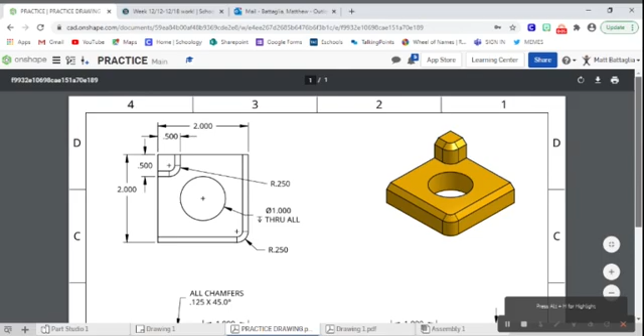Today we are working on creating this, our practice drawing. Taking our practice model, going ahead and placing it in with a few orthographic views as well as an isometric view, going through and annotating it with center lines, center marks, as well as dimensions, and then the submission process.

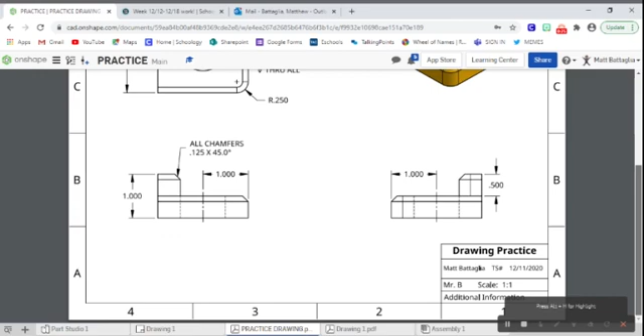So let's get started. In order to get started here, we are going to start with our blank drawing template. So go ahead and bring up that blank drawing template. I just so happen to have my template in with my part number one. You can start a new one, whatever works for you.

But make sure you have this blank drawing template, and we are going to go ahead and place in our views. So we're going to start with our base view. Our base view is going to be the view that all of our other views are based off of. In order to place a base view, you're going to go up here where it says Insert View, and we'll click that. It's going to ask you first which part or model you would like to insert.

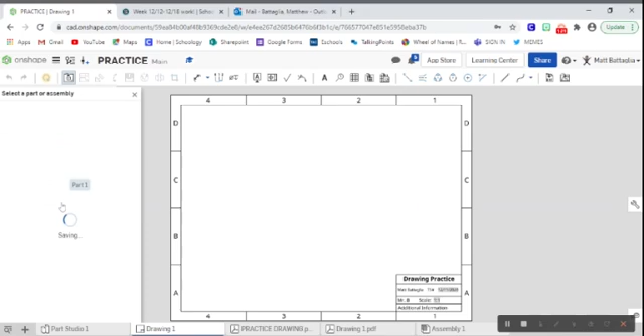In this case, we want to insert part one or model one. Once you've selected a specific part, you want to make sure that you're orienting it in the correct direction. You want your base view to kind of be your front view. In this case, this works great for our front view, we're just going to keep it just like that. So what I want to do is kind of line it up generally where I want it to be. Right here is good.

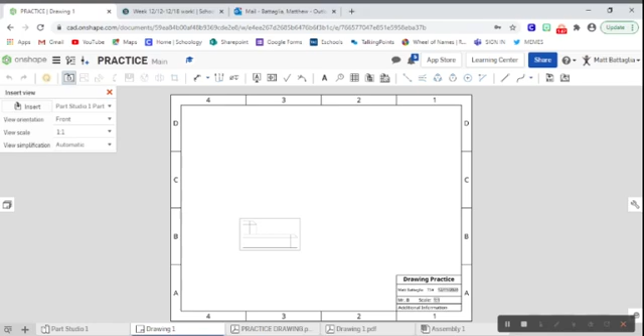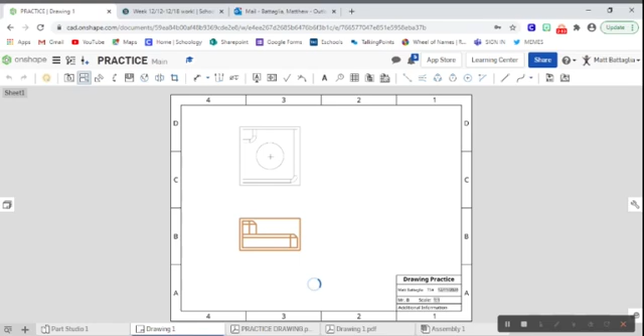We can always adjust it later. I'll go ahead and do a left click and release. When I left click and release, you'll see that I have kind of a general outline of this front view right here. Now, before you do anything else, we can go ahead and immediately place our top view, and you can kind of see what this top view will look like based off of its projection. So we'll go ahead and drag this top view on top, and we'll do a quick left click, and that will go ahead and create those views.

Now you'll see if I move this view, I go ahead and I move this view is going to move in conjunction with it. So that's why when I say base view, that's what I'm mentioning. It's all of our views are based off of this view. And if I move this one, that one will move in conjunction so that these are aligned with one another.

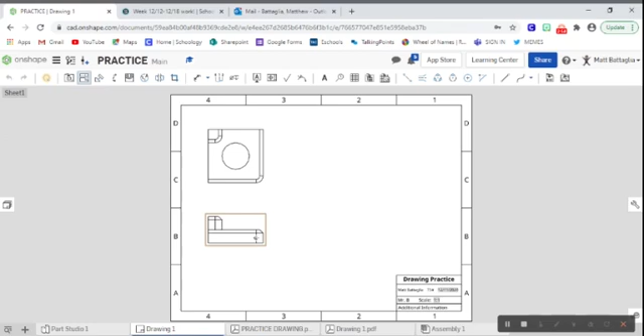Now, we have our front view, we have our top view, but we still need a few more views. We need our side view, and we need our auxiliary view or our isometric view. So I'm going to go ahead back up to projected view, and I'll go ahead and left click projected view, and I'll go ahead and left click on our base view, and I'm going to drag out and place our side view or right view. Go ahead, left click. Once you have that in, that's great.

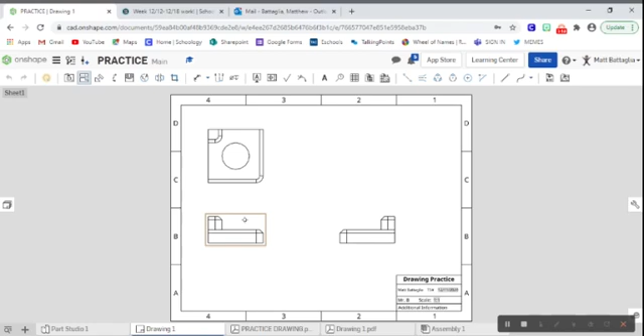We're going to do one last view, and that will be our isometric view. So once again, if I left click my base view and drag out, you'll see that I now have my isometric view, or that kind of 45-degree three-dimensional view. I'll go ahead and left click, and now I have all of my views placed. So I will escape out of that tool, so I'm no longer in it.

And once again, you can see that all three of these orthographic two-dimensional views move in unison, which is really great. So we'll go ahead and adjust those around. That looks good there. We'll adjust this over here. And now we are ready to set ourselves up.

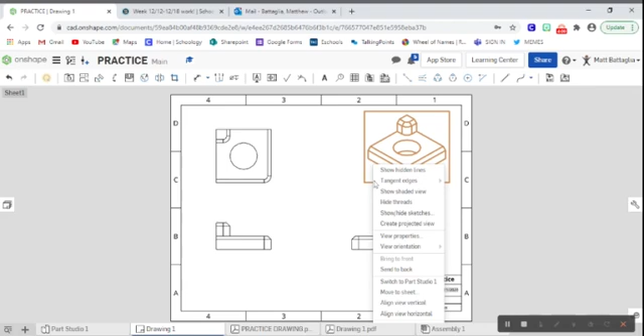So the first thing I'm going to do is I'm going to go ahead and right click on our isometric view, and I'm going to press Show Shaded View. When I press Show Shaded View, it will go ahead and load in that color or material or appearance in which I selected in our previous step. So there you go right there, that's our shaded auxiliary or isometric view.

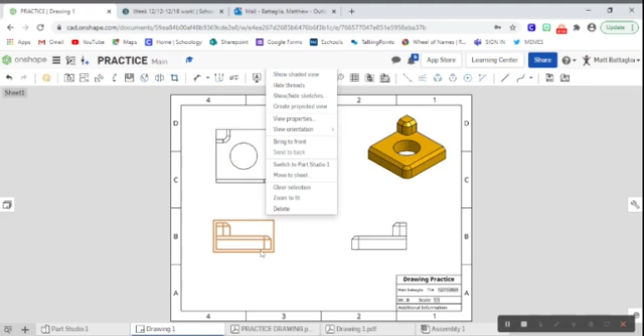So the next process in this is going ahead and adding our hidden lines to these orthographic views. Right now we do not have our hidden lines added. We don't have too many in this, but it's good to include. So I'll right click my base view, and right now it's kind of hiding it, but I should be able to, yes. So if I click on one of the other views, show hidden lines, you'll see it went and shows it. Now it is kind of hard with this. Maybe if I scooch this down.

Show hidden lines. Make sure you're seeing your entire menu, and go through clicking on all 3 of these views. Might have to move that one down as well. Right click, show hidden line, right click, show hidden line, right click, show hidden line. Now you can see my hole showing as my hidden line on my side view.

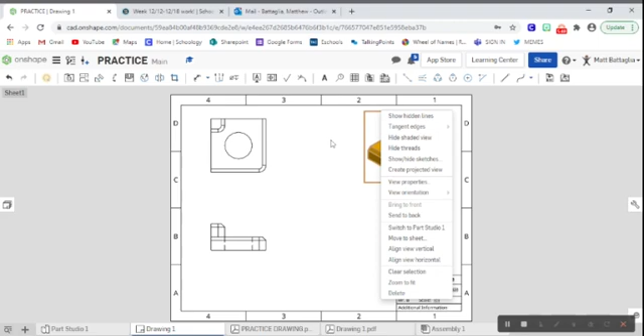So take some time, get your views placed: front view, top view, side view. Keep in mind this is our base view, our front view. We have our auxiliary view in here. We went through and right clicked and shaded it, shade view, show shade view, and then right clicked on each one of these to show hidden lines. We can probably also do that all at the same time by shift clicking and then showing hidden lines as well, so that's up to you how you do it.

Our next step is to annotate our drawing. Actually, I apologize, I scrapped that. Our next step is to finish filling out our title block.

We have the majority of our title block filled out, but we don't have quite all of it, right? So you might have to go in here, and it probably says drawing. This is going to be called drawing practice or practice drawing. So go ahead, double click on that top part and adjust this to practice drawing.

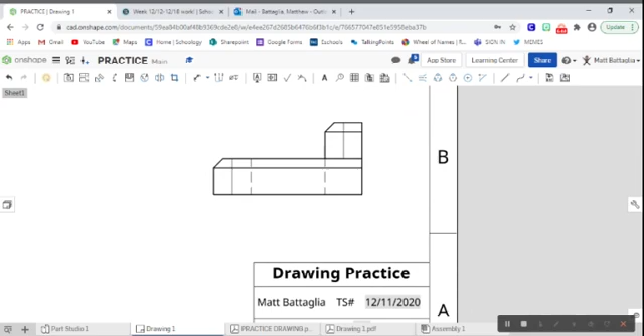Now, depending on how you set everything else up, you might only have to change one other thing. You can see in here it pre-added my date. If I zoom in, you can see that it had added my date automatically, which is awesome. You'll also see that it automatically added my scale based off the scale of the models that I've placed, and I placed this in at a 1-to-1 scale, so you'll see it's referenced as 1-to-1.

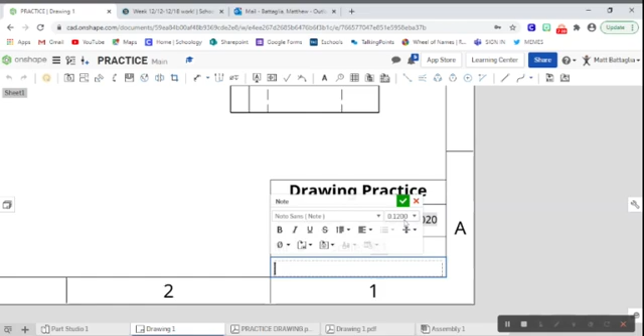However, most of you will have to adjust this additional information, so you can go in and change it as you know to whatever you want. You can change it to the color, mine now is kind of gold-ish, you can put color gold. You can put front, top, side for your views that you included. You guys know that you can put basically anything in there as long as it's relevant to the drawing and you actually have something, so go ahead and make sure you're adding your additional information.

Oh, I can't spell. We'll go ahead and hit our green check mark, I'll do a right click and zoom to fit, so we're back to where we need to be.

Now that we have our views placed and we have our title block completely filled out, we are ready to start annotating. Annotations in this drawing template have to do with adding both your center line, your center mark, as well as your dimensions. There's a whole lot more that can be done in here, but we're going to keep it simple.

So before you add your dimensions, you add your center lines and center marks. Center lines are added to holes in kind of a side view, and center marks are added to full circles or partial curves. So let's add our center lines first.

Up here it is an edge-to-edge center line. Go ahead and click on that and you'll see it highlights. Now, to operate this tool, you click one side of your hidden line - so you see I click the left side of my dotted line, then I click the right side of my dotted line, and you can see I have the center line placed perfectly in there. Once again, same thing, boom, boom, there's your center line.

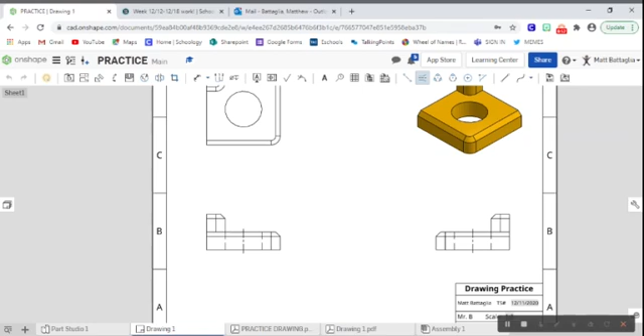We are now ready to place our center marks. So that's your center lines - let's go ahead and get ready to place our center marks. It's not this tool, it's not this tool, we are going to use just the simple center mark tool. Go ahead and click on that center mark tool.

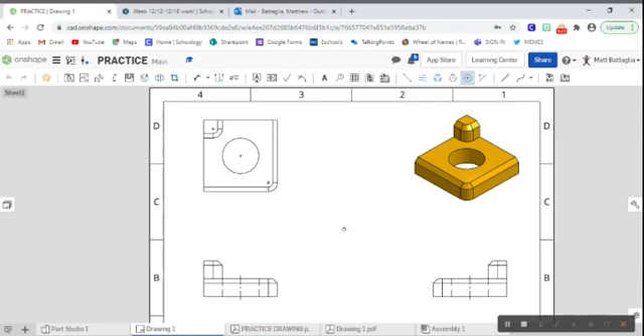Then we will go ahead and first click on the large circle - that will add our center mark in there. It's also important to add those center marks onto fillets, so we'll add a center mark there, and we'll add a center mark there. I'm going to go ahead and escape out of my tool and zoom to fit, and you can see we're all set up for dimensions.

And that's basically the last step in this process. So what I want you to do is go ahead and use the piece of paper or file that I referenced to you and provided to you, and make your drawing basically look the same. Typically we're going to start with our overall width and height kind of measurements here.

So we'll go ahead and place this 2. We'll go ahead and also be placing this 2. And now it's kind of following along, so I'm going to go ahead and place my overall height.

That's one right there. I'm going to place the top portion distance, so we'll click there and there. That's 0.5. Now we know that this bottom part is also 0.5, because if our overall is 1 and our top is 0.5, I don't need to include this bottom distance of 0.5. We already know that. Okay, since we did the height of that, let's get the overall width.

Get that as well. And it looks to me as though I might need to slide this down a little bit so I have more room for my dimensions, because it's important that you're keeping your space on everything, and everything looks really nice and neat.

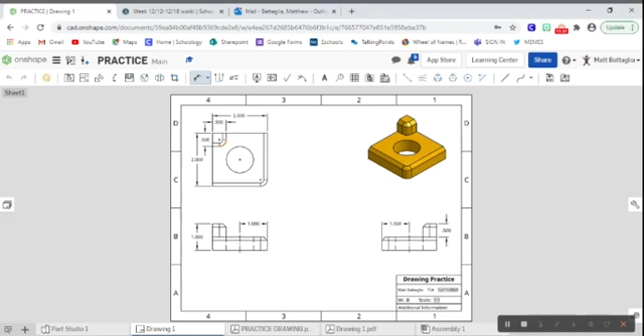These ones are a little bit more complicated. The first one we'll do is the radius on this fillet. We'll click on, actually I'd like to use the outer one, so go ahead and click on this here. We'll drag it out so it's outside of our object, and then we'll left click to place it. So that's that. That one was pretty easy.

This one's also pretty easy, at 0.25. And you can also line these up, which is really nice. So we'll line up that edge as well, and then you can adjust it if you'd like later on. So yeah, something like that looks good.

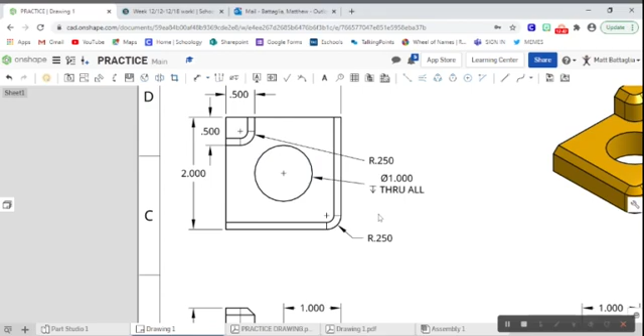All right, our last one here is to go ahead and place this one. Now this one's a little bit different. We're going to double left click on it, and down here we are going to insert a symbol, insert the depth symbol. As we all know, that's the depth symbol, and our depth is through all. So if I go ahead and type a depth of through all, I know now that this hole goes all the way through. We're just practicing using some of these symbols here, not super necessary to the drawing itself.

The very last one that we're going to add in is our dimension for our chamfer, and this one does require something. For this one, you have to left click on your dimension to bring up the drop down, and you have to, once again, left click on the chamfer dimension. So I'll click on this chamfer, I'll drag this out... come on... click on the chamfer, drag it out, and place it. Oh, I'm sorry, I'll click.

So for the chamfer tool, I forgot it's a little bit different. You have to click on the chamfer, and then you have to click on the top face as well. So you might be able to see I clicked on the chamfer, and now we're going to click on the top, and that will help identify the angle in which we are moving as well as the length of the line. So we know that we made this chamfer 0.125.

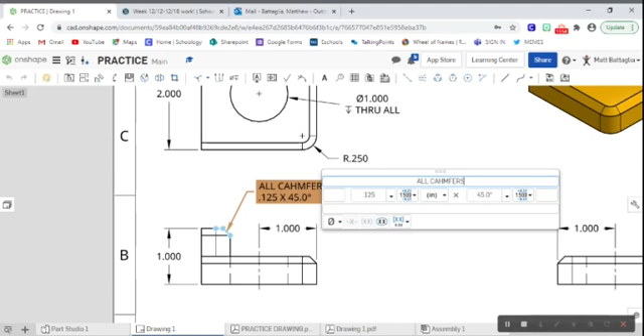The very last thing we're going to do is double click, and we are going to add 'all chamfers' - and once again, I can't spell - all right, 'all chamfers.' That's going to go in this top line here. So once you add 'all chamfers,' that references not only this top chamfer but this bottom chamfer as well, so I don't have to include that second measurement. We dimension this top chamfer, but it also references the bottom one, since it says all chamfers are exactly the same. And they are.

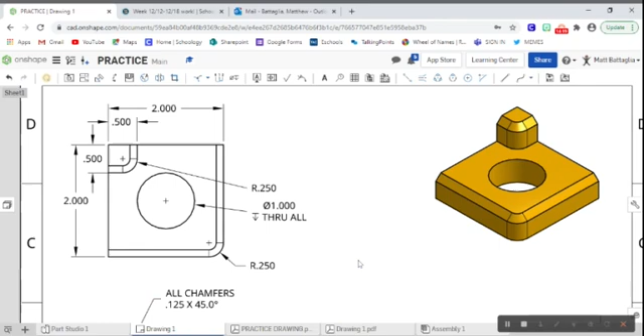Okay, let me do a quick zoom to fit. This is what we are left with, and this is our completed practice drawing. So what you need to do at this point, if you'd like to do some last modification of scooching stuff around, making sure it's all in the correct place, and then you are going to follow that same process for exporting as a PDF file.

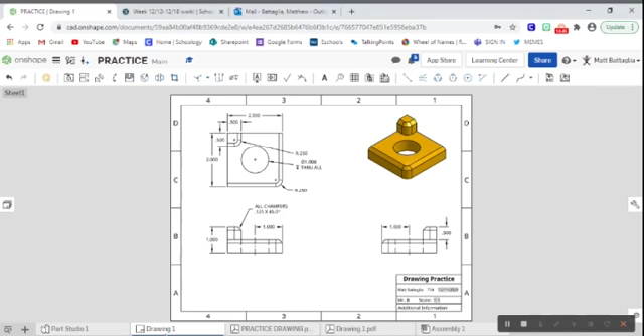So I would simply right click, hit export, name this practice drawing, and we'll go ahead and hit export, and that will export it. Make sure you are in...